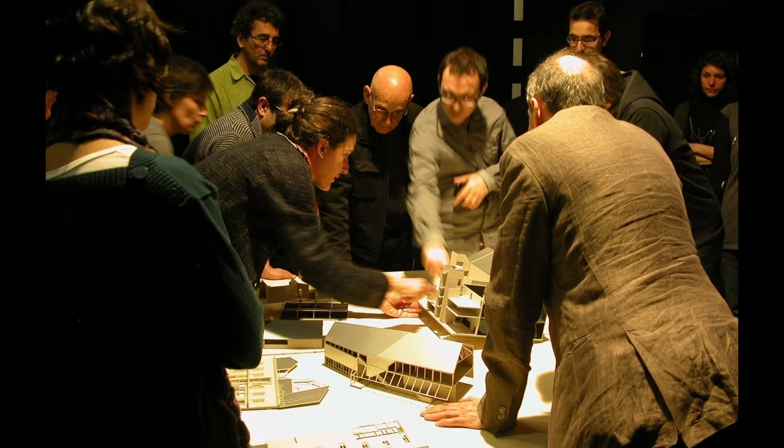This is the board. All these people are very well-known playwrights in Barcelona, but in Spain as well, and they are very prestigious. And still, it's very interesting how they were connecting immediately with the project, with the models. This condition of working with models allowed us to have a very fast connection with them. This is the director, Toni Casares, who is leading Sala Beckett, named after Samuel Beckett, who gave the name to the place.

When they had already been working for 10 years, they asked Samuel Beckett to give the name. He accepted. He was living in Paris still. And then, because the kind of theater they make is this theater of the speech without scenography, and they write theater, he was the one who convinced the municipality to find a place for them.

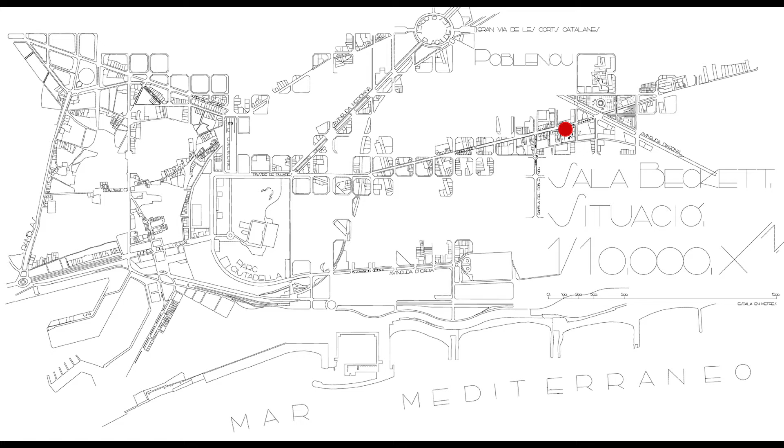Sala Beckett is here. Our office, what you saw before, is here. We are in the middle, in between the old town and the grid. If you know Barcelona, this is the sea, and this is Poblenou, which is a former industrial neighborhood, which used to have industries and cooperatives for the workers spending time there. So this is Pere IV, which is an old road coming out of town. It's previous to the grid. So that's why it's inclined and it's taking its way up to France, let's say.

So the building was here in a corner, the cooperative. It's a very simple building, very clear in structure. Typologically, you can see that it comes very much from the industries that are around, because they have these naves, 2 naves of 11 meters without pillars, with these trusses, and then a central passage, let's say, of 5.5 meters. It was very wide and also very generous in heights. The heights were 5-6 meters. So it was a place already prepared for other activities besides the cooperative.

The cooperative went bankrupt in the 1980s and it closed. So the building was abandoned and had different uses and also decayed. It had water, rain coming in, and they had some uses in the ground floor as well. So it was in quite a decadent state, but still there. The building hasn't always been like you have seen it.

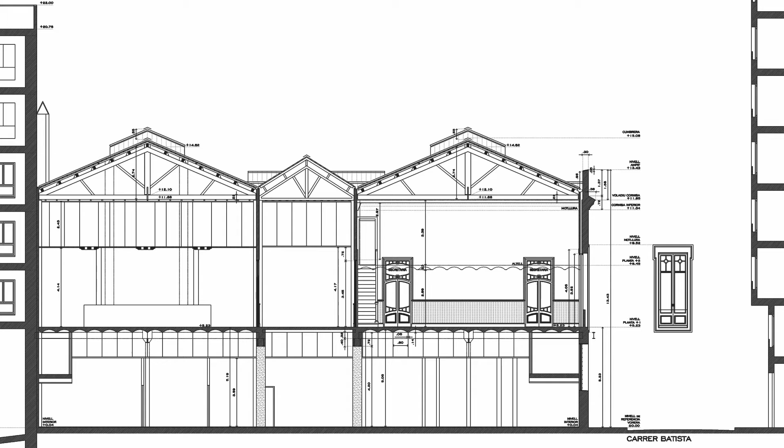When it was built in 1924, it had this front here on the top. It was a kind of signal of the front door, and the workers organized a space to buy food at a better price in the ground floor, and then organized leisure time above. There was a bar and a theater. So the section of the building Ricardo was explaining is this simple thing. But the interesting thing is that the ground floor was independent from the first floor. Here was leisure, and here was buying. And the staircase to the first floor went straight from the street up. It was a great space.

It was in the 20s, so hard moments, and the workers were able to organize themselves to build such a generous building. This is the bar upstairs with all the billiards, 6 meters high, and the grocery store was great, as you can see. Piles of food around it. The same tiles like in our studio, with light, windows, with all the good things around. Very nice, a kind of market, organized a little bit. But this is how we found this beautiful building when we entered it.

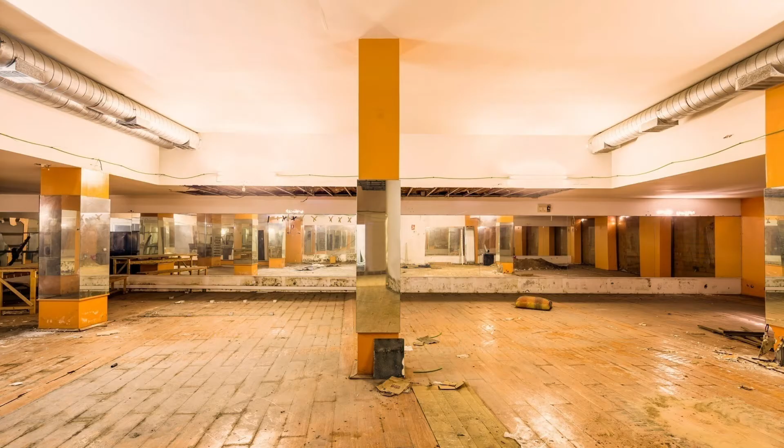The ground floor had been a gym that didn't last, but they had covered all the walls with mirrors. It was blocked. The natural light was not getting in. And even the very thin pillars we saw were inside one of these. Plastic floors, they changed everything. This is the middle part, the vestibule where the old stairs used to be, going to a mezzanine level. Over the years, the building had been adding levels, the kind of Roman swimming pool they have. So there was no clue of the former cooperative, only a small staircase coming up. And the first floor had been left as in the years of the workers.

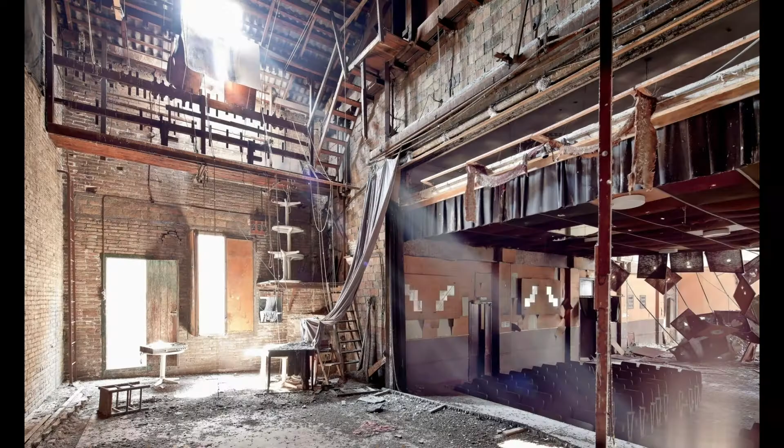This was an old school that was built in the 40s, slightly later, on the back of the building. But you can still see the light, and classrooms can happen here. The theater instead was very much destroyed. The only natural light was getting through a hole. So it could be a menace of destruction for the building, and it really was. The rain, pigeons, rats were inside the building. But we thought that this ray of light visiting the building was a sign of optimism, that again, this space could give theater. Also because the decadence was very impressive as a scenography itself.

The building was not listed, so the neighbors who were part of this former cooperative could see the building in decay from above. The neighbors living around could see the roof every year with more holes. The theater was where the roof was in much worse condition.

This one was the old bar that you saw in the photo. The bar was still more okay. This was a competition, and we were visiting the building with the director of Sala Beckett and the other 5 teams. And the director pointed at the walls and said, okay, Sala Beckett, we dedicate ourselves to writing. We put plays on display for the first time, but we are looking for new writing. So coming here to work for us every day, we like not having a white piece of paper. So we like the stories around this building.

But he said, it's up to you. The building is not listed, and if you think that this is not strong enough or can't resist a theater that I want to work with the full conditions of modern conditions, it's up to you to decide what to do with it. But Ricardo and I, we love the building. We love the huge spaces that are not so common to find in Barcelona, and we love all these elements.

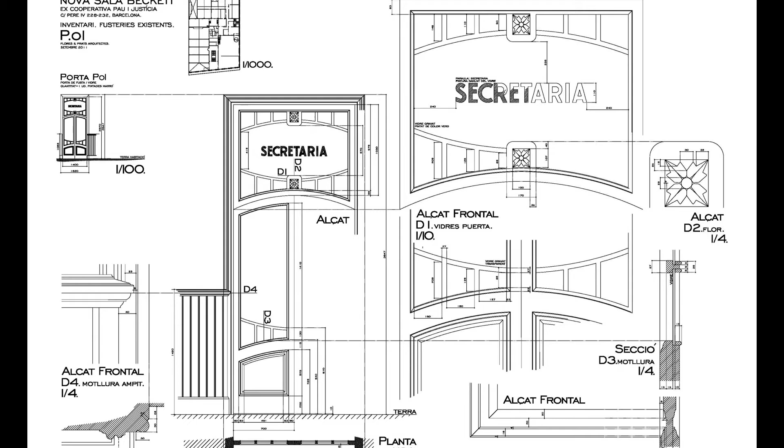So when we got the competition, we started drawing. We spent 3 months inside this building, drawing all the elements that we thought will be useful for later as a treasure. Also because still today in Barcelona, you can find containers in the street with buildings being renovated, and a lot of these doors still out in the street that no one cares for. So we knew we had to draw it carefully to make the builder understand that this was important for us, that this was our treasure, and we wanted to keep it.

We wanted to keep it, but we didn't know where, because all the distribution of the building will change. So these doors will move around, but we have them. Every one has a number. We have this kind of arsenal of doors and windows. And we were placing them in the model as we were learning how the building will work again.

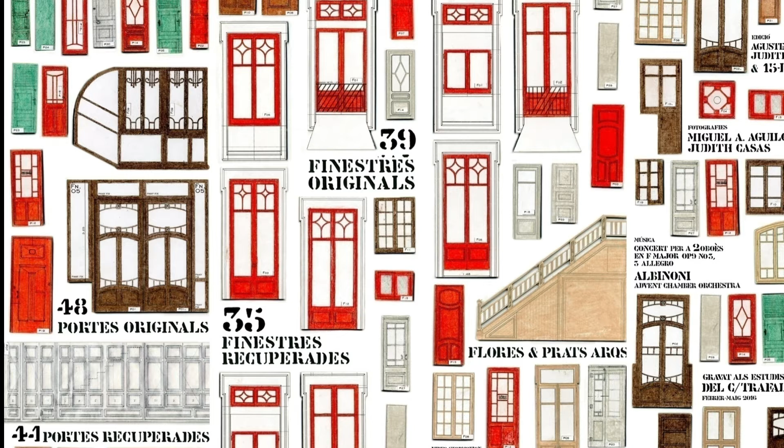They also had colors. And in the colors, there were signals of these times that everyone was talking about. We noticed the colors were more pastel in the 20s, more light colors. After the Civil War, they get into this dark brown. So the doors themselves carried information in their colors. The same thing that happened with the colors and the doors.

We started to think that the walls were also a remain that we could bring over to the new project. So we drew all the sides, all the facades of the existing building, all the interior facades, to bring them into the model and have something already from the beginning that we wanted to keep.

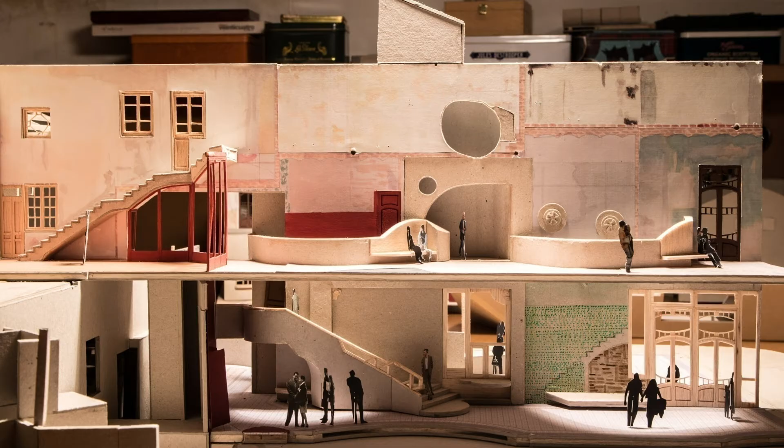The vestibule, which is what this model shows, is the key part of the project in the sense that it's connecting all the building. Because as Eva said, if you remember, the ground floor is a grocery, the first floor is a cafe, in the back part is the school for the kids. But now it's only one project. Sala Beckett is all of it. So the vestibule should show how all the building works at once.

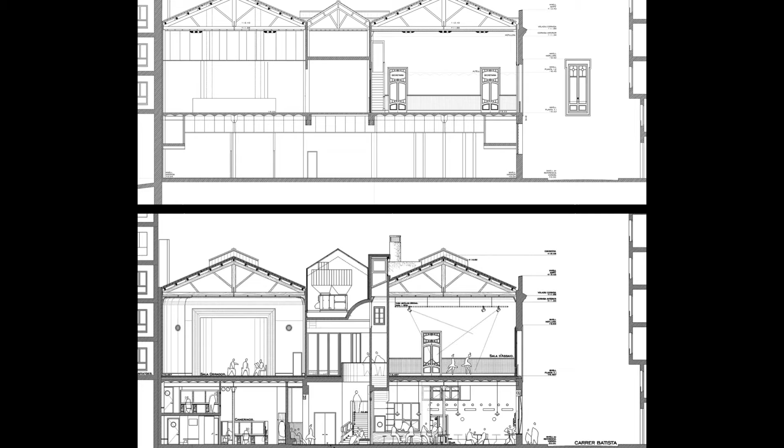So the vestibule with these new openings is connecting vertically, and with the light and the circulation is the way we were intending to make the students or the people who come in the morning to work and in the afternoon understand that everything is working connected.

So in the ground floor, you had this former gym that Eva was explaining, and the proposal organizes in the corner a public part with a vestibule where you enter, you can collect your tickets, there's a sofa, you go to the toilet maybe, and then you go to the bar. All this part is the vestibule. Bar and vestibule is one thing, and there's another entry for the actors, which go to their place to prepare for the play, and that's the main exhibition space in the back.

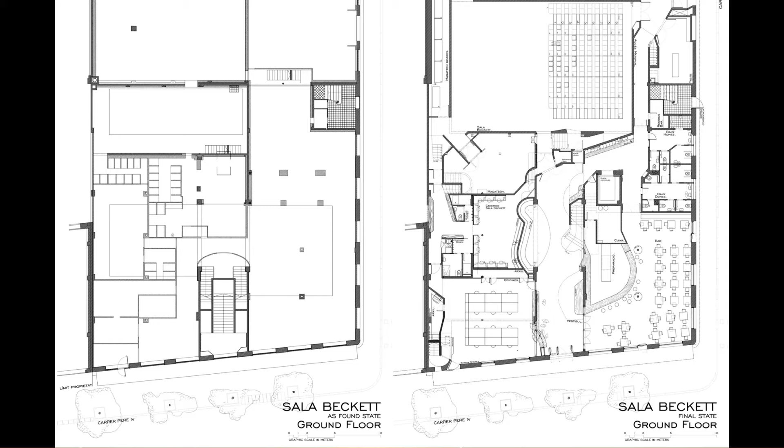So that's the ground floor level, and there's an entry for goods and for the technicians on the lateral street, for them to have a workshop and all the materials for the play.

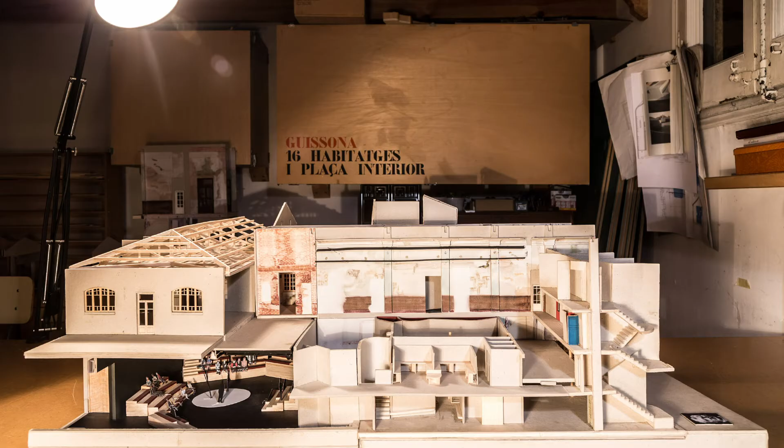This is the vestibule, the main exhibition space. The former school for the kids is still a school for teaching theater.

The mezzanine, which was this kind of in-between space that was already built, we eliminated as much as we could to recuperate the original heights, except for one part that was kept for the authors, for the theater directors, this little bit over there. They call it the Authors Club.

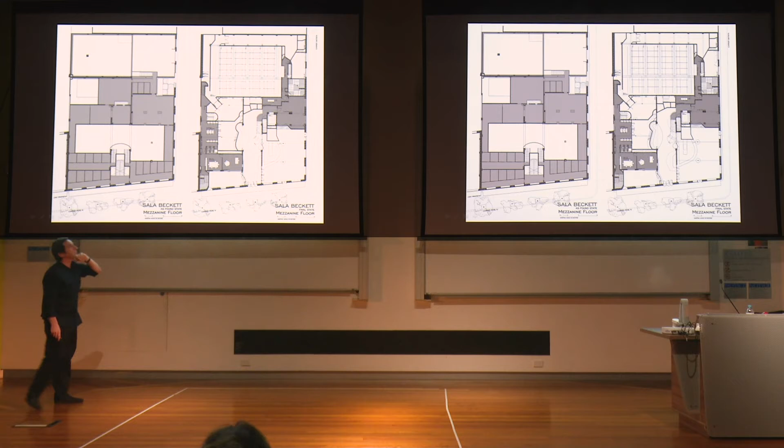It's a place where mainly what they do there is meet. What happens is that the directors of the play don't want to be present in the theater the night of the opening, but they would want to know how it goes. So there's this kind of dilemma.

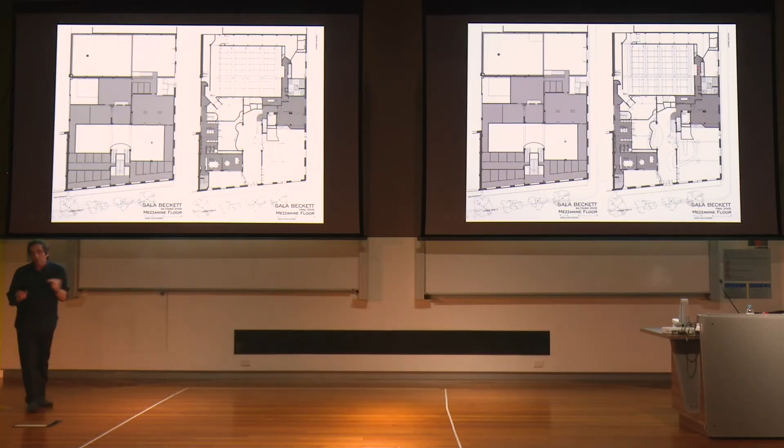So what happens is that we did this connection to the technician room over there. So they go very slowly and they are behind the technician to see, and they say, oh look at that, there's the people of the journal, whatever. He will kill me, he will destroy me. So he comes back over there, drinks a scotch, and gets knocked out for the rest of the night. More or less, that's a bit the situation, no?

But they are in a bridge between the bar and the main stage. In that area, there's another dressing room for the people who play upstairs. So we have ground floor dressing rooms and mezzanine dressing rooms for these people who play up in the former theater. So this connection makes them appear in the former stage, but now there's no stage anymore.

Everything goes on the same level because Sala Beckett doesn't work with stages, and they change constantly the relationship between public and scene, as you can see also here on the ground floor. So you can have theater simultaneously in the two rooms, and also in the former cafe there's a rehearsal room, so you can have sometimes a small place there. So the former theater becomes a theater.

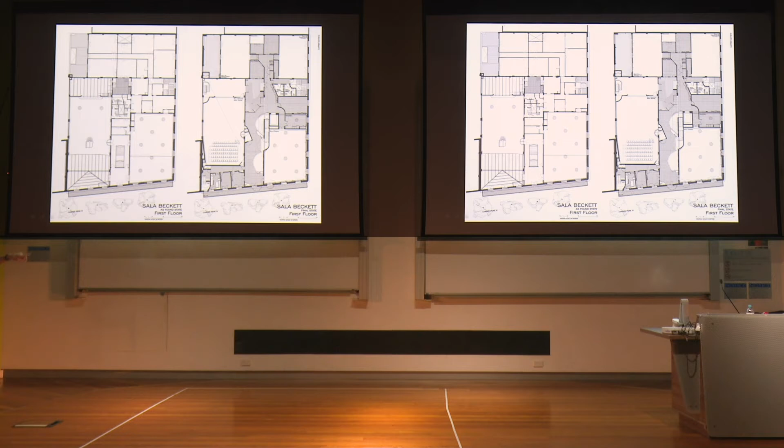There's a part of offices against the light. And the most complicated thing, let's say, about the project is how to connect and bring all the back part connected to the ground floor and to the frontal facade.

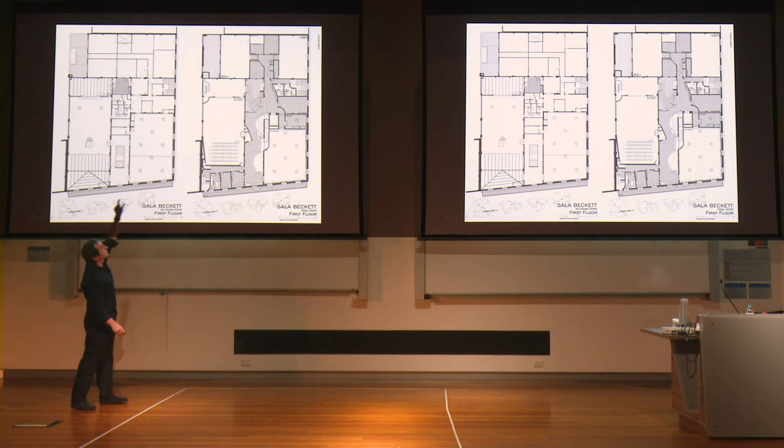That was what gave us the most work, because we had to make it work continuously so that you didn't realize that you were passing from ground floor, first floor, and to the back, let's say, property, the last nave, without any limit or realizing it. So the courtyard in the middle helps a lot, and the skylight over the staircase as well.

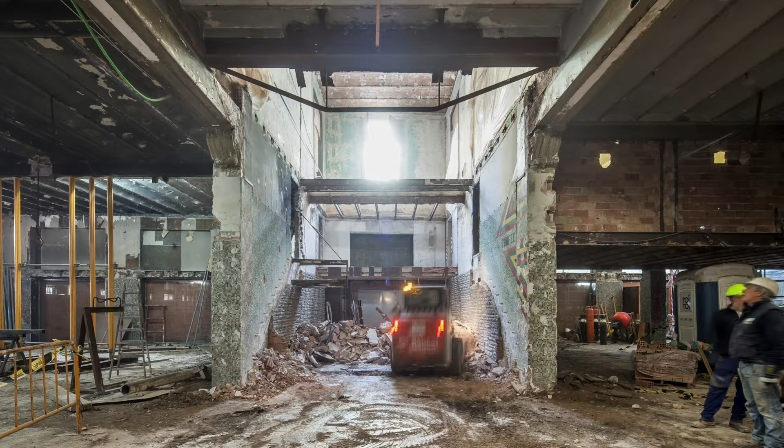So when the building started, as you saw, the building was in very, very bad state. The first thing we had to do is remove the central floor slab, because it was also very discontinued due to the former bathrooms of the theater, the staircase that was there but also falling down, etc. So the central part, which was the one we were going to change entirely, was the first thing to take away.

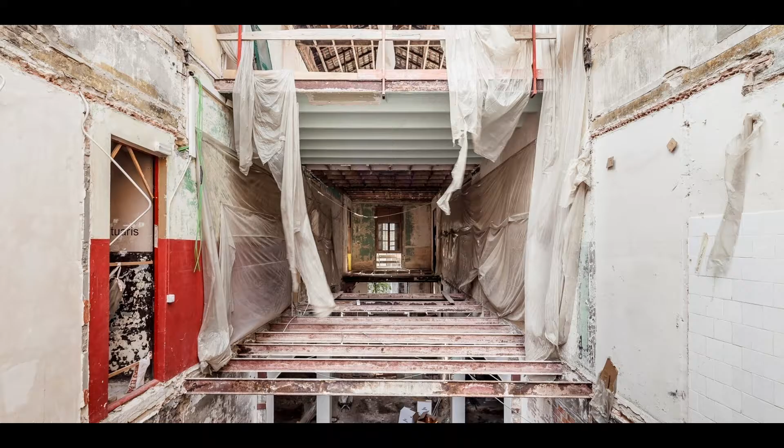In certain moments, you see that the building is suffering. If it was already a ruin, you are like accelerating the ruin. You are bringing the ruin forward. You don't know really if the building will support it or not, because it's shaking. It's very violent, as you know. So there were certain moments of tension, of uncertainty, because you don't know how much it will resist.

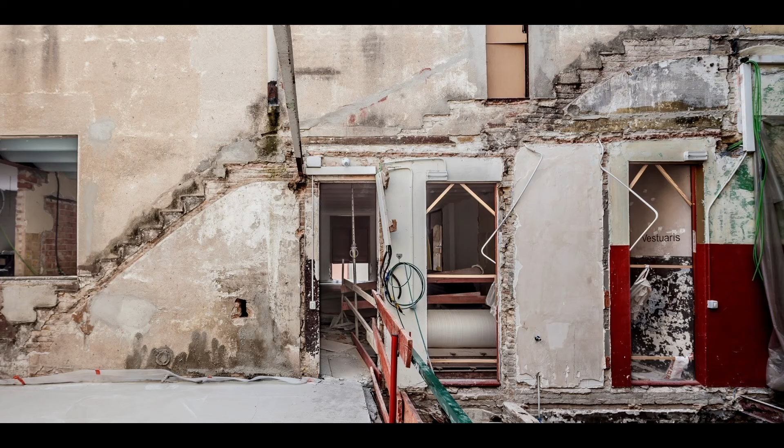But then all the doors are sent to storage. All the walls, these lateral walls, are protected with plastics because all those paintings, we like them, even if you don't know if you like them or not.

But at the moment, you protect it, and then the builder says, 'No, but what are you protecting? This is going to be painted.' No, we like it very much. 'No, how can you like it if this is nothing? It's a ruin.' No, we love it. So it was constantly this kind of fight about protecting something that you don't even know if you will like at the end or not.

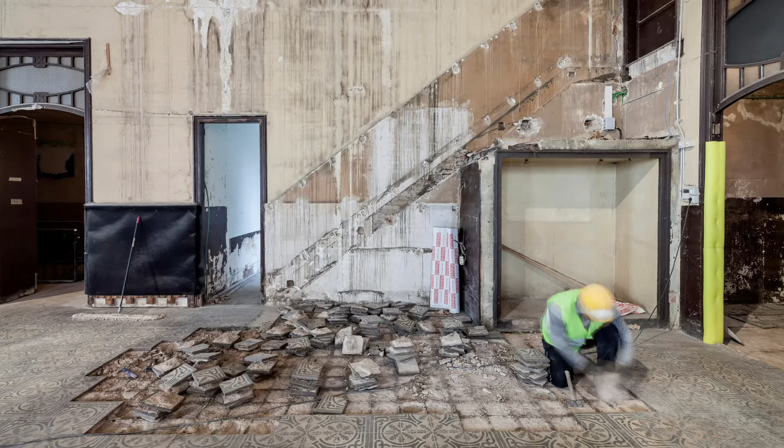But at the moment, you protect it. Then you take all the tiles away. The tiles are in our office. The doors also are similar because it's built in the similar moment.

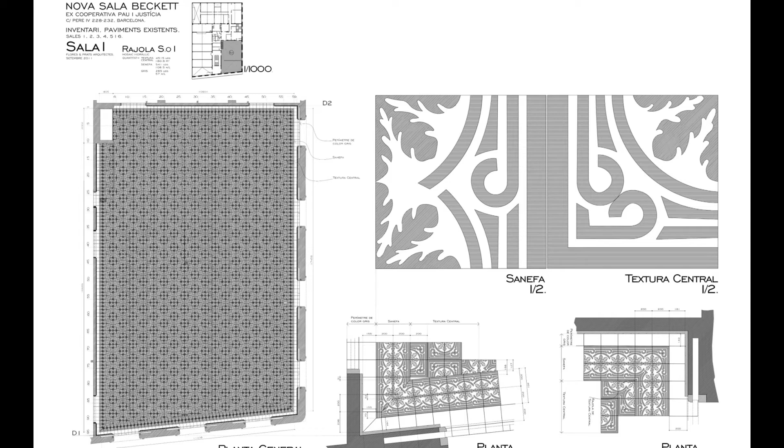So we have drawn all the tiles of all the rooms, the same as with the doors, roses, etc., in this inventory, to know how many meters we had, how the turns of the corners would work, etc., to reuse them, to know how many of them we had, even counting that many could be broken, but still it was what we had to work with.

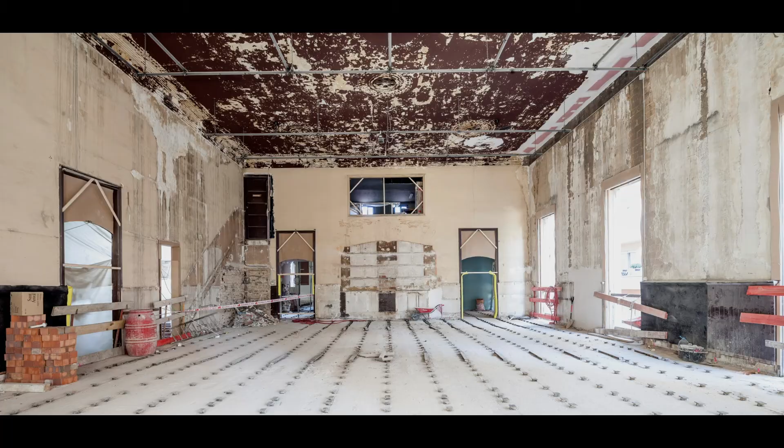So all of the rooms were inventoried and then sent again to storage. So at a certain moment, all the first floor was empty. We had to reinforce structurally because the building was from a time with other norms. So we had to reinforce it, and also acoustically. So these are the moments where you empty it, all the tiles are away, the doors are away, everything is away in storage, and then you reinforce.

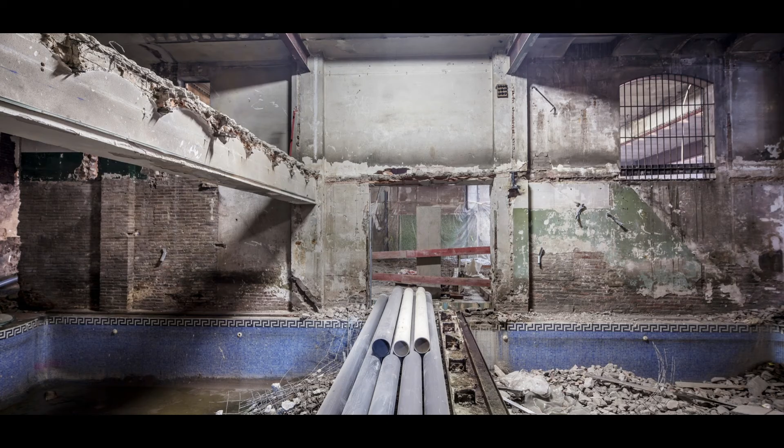In the meantime, on the ground floor level, we destroyed the sauna, the pool, the beautiful Roman pool, making more space for the new theater. We grounded it down and then demolished this wall, because one of the conditions of Sala Beckett is that they needed a 15 meter wide space for the theater.

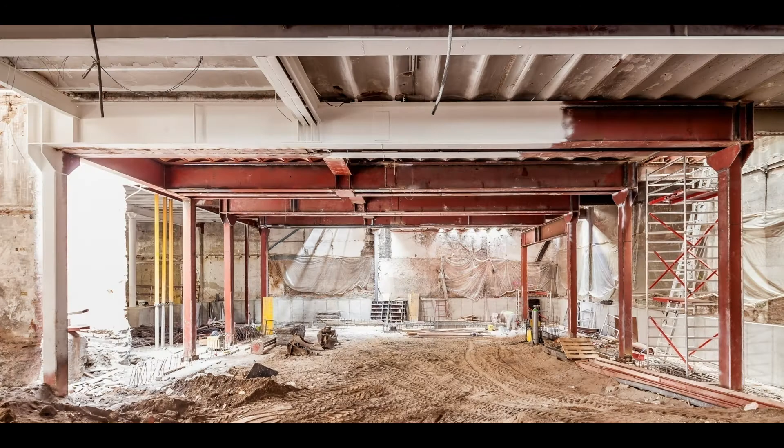So we had to put a beam to support one of the walls to make this wider, because they wanted to have a space where they could make different positions of the stage and the public. For this to happen, you need a minimum of 15 meters: 4 meters of public, 7 meters of stage, and 4 meters of public.

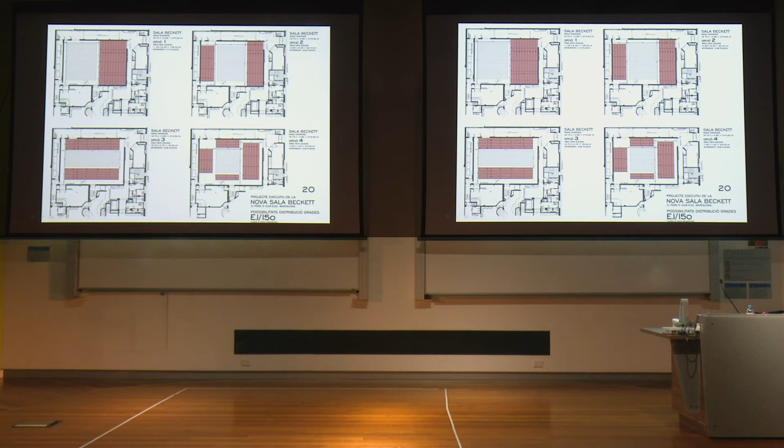There was nothing like that in the building before, because if you remember, this was 11, this was 11, and that was 11. So we had to demolish some parts. On the ground floor, the back was the less historically significant part of the church, so to speak, so we did that action over there.

The good thing is we didn't have any preconceived ideas. We were fresh to it, so we brought all our knowledge from rehabilitation, but not from the theater world. They knew very much how they wanted to work, so this mix was really key. They were telling us all the time what they wanted and what they didn't want, and we were saying what we wanted for the building to be.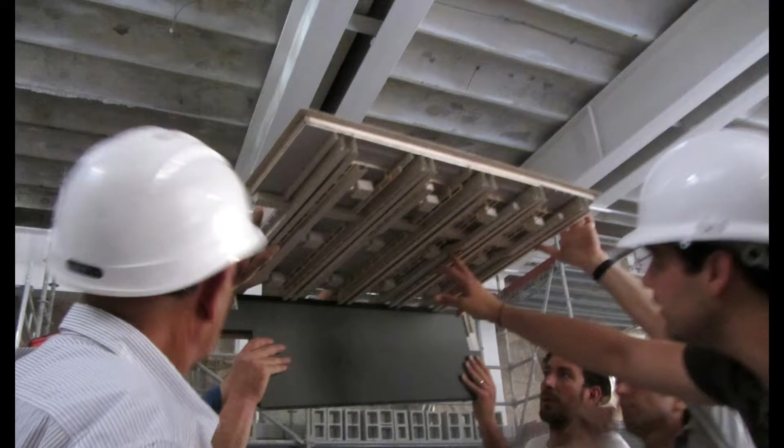The models later went to the site—these models helped us determine where the air conditioning, supplies, and all the mechanical installations would be. So the model is something we use from the initial stages through to the construction site. It serves different purposes at different stages.

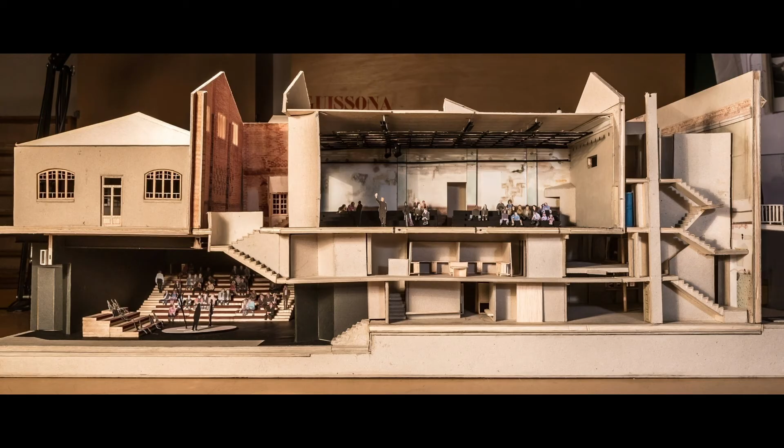This is the ground floor space, which, because it's new, they wanted painted black. It's the only piece in black in the whole building. Whilst on the upper level, the theater was kept mainly as it was.

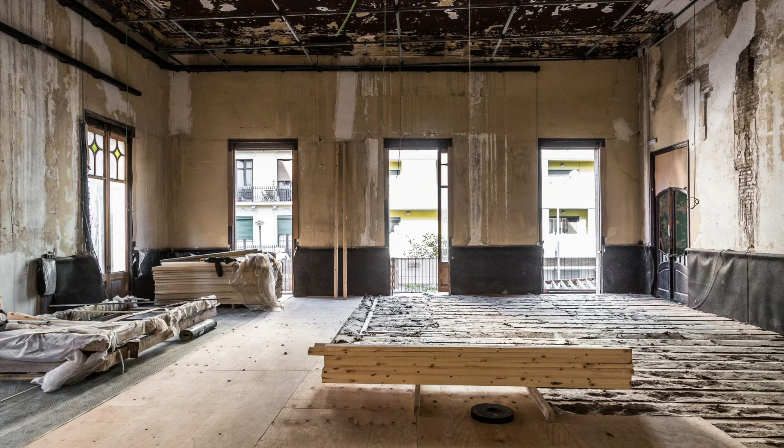But you see the floor is not the same—the floor is not tiles. They wanted wood for the theater spaces, and that's why we could take some tiles to use elsewhere. There were several layers besides the acoustic ones to put in the wood, and it was a very well designed wood layer worked out with our advisors—also for the former cafe, the rehearsal room.

So all those tiles that were here before are not here anymore—we could use them in different places that had no tiles. This is the former theater, this is the former cafe, the school. So in the vestibule you see tiles from the former cafe, the new vestibule, and some tiles from the school, because the school also has two rooms with wooden floor, which is the green one.

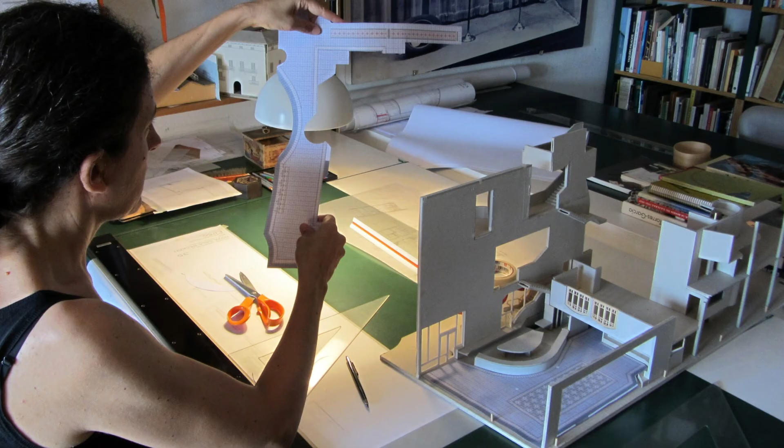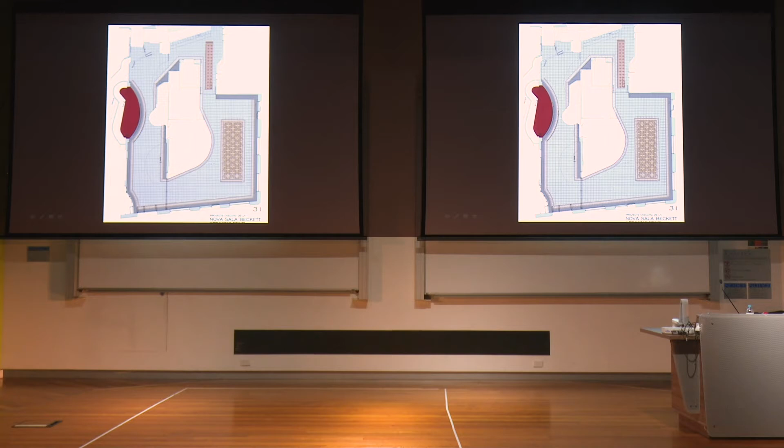We could bring some yellow tiles forward to welcome you. Some of the tiles from this space, the theater, went down to the ground floor level, because, as you know, there was nothing there. So all the tiling of the welcoming part of the vestibule and the bar was carefully done with the upper level tiles, trying to emphasize the circulation around the kitchen and bar—everyone moves through there. This central part is very important for the vestibule, for expanding the vestibule out to the street.

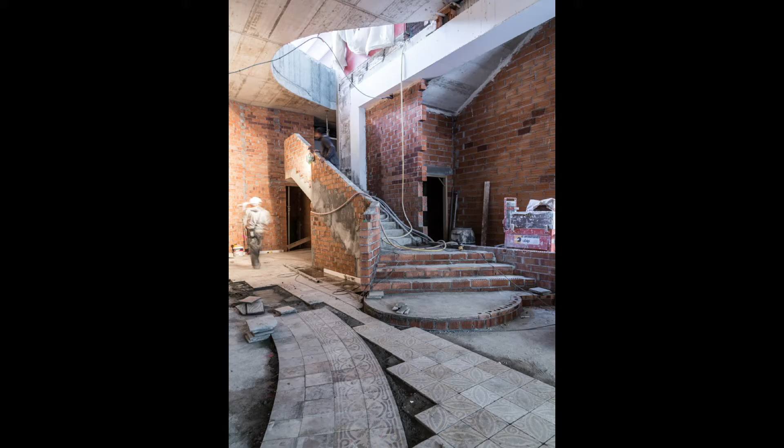We ran all these tests to know how the tiles could curve, because we'd been doing some curves, and these tiles aren't designed for that—they're only meant to be laid orthogonally on the floor. So we were worried about whether this pattern would continue properly or not. We made all these tests before going to the site, telling the builder: yes, you can cut it and make the curve, cutting just so much each time.

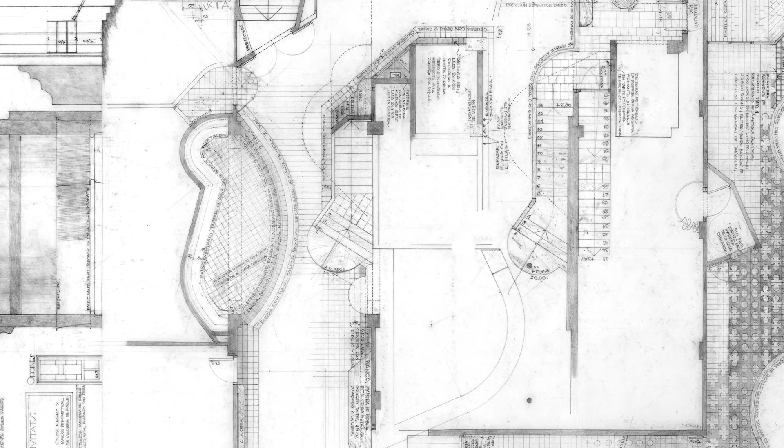He was delighted, of course, to do that kind of work, but it was all part of the project. This happened all around the first floor as well, so the laying of the vestibule downstairs and upstairs is very continuous, because in a way, it's the element that carries you all the way up.

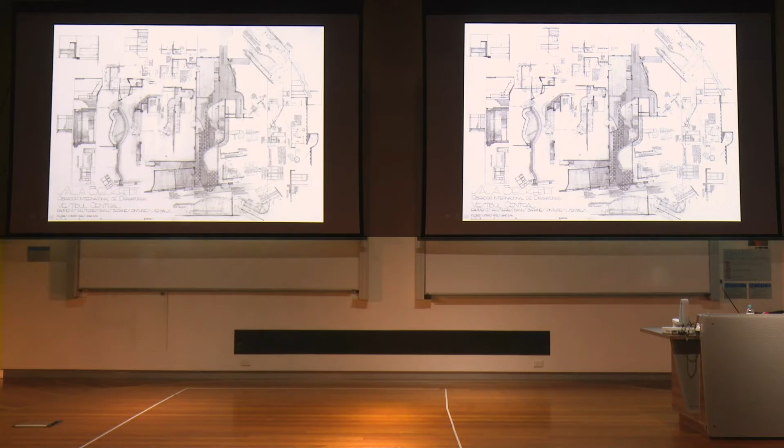This drawing is explaining the ground floor and first floor, and as you see, the pavement goes into the back, but also shows the lateral facades because the benches and the holes in the walls are continuous in plan and in section. So those drawings for us are very important to try to control or explore everything we want for the same space.

So finally, you see the pavement is not located exactly as it was originally. It's a bit moved in stripes because it's a corridor place. The yellow ones over there are coming to welcome you from the children's area. Some of them returned, of course, broken, but they were located continuous. There were the ones that were held.

We told the builder, well, look, if you broke them, cut half of this and cut half of that one, and you make one out of two, which again he was delighted to do. And this was the kind of discussions and fights on the everyday. So because it was very, very low budget and we had to use everything we had, also because we valued it.

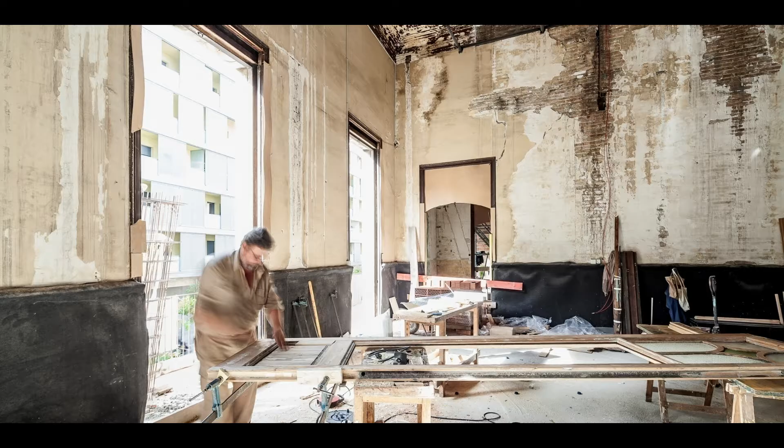So also the doors were waiting there for being relocated and refurbished. They had very good carpenters, fortunately, who were extending, modifying, adapting everything. Every door was useful. Nothing was going to be thrown away. Fortunately, they knew how to work with this wood and with this kind of moldings and that.

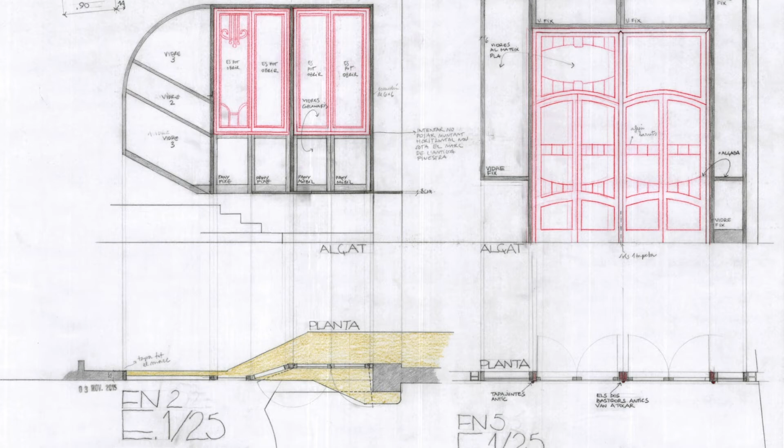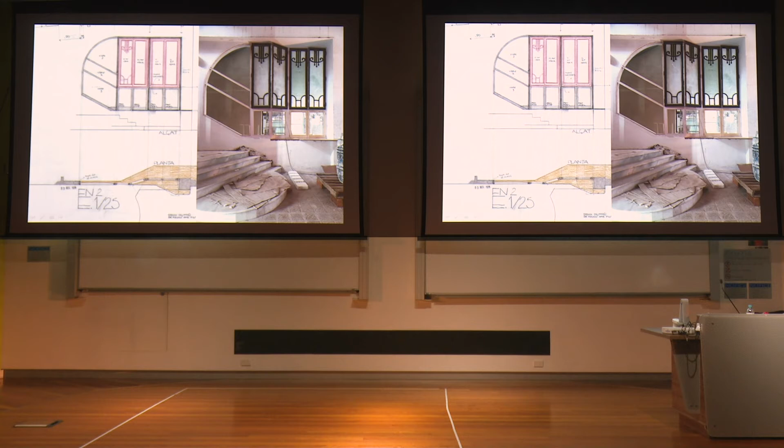Some of the windows went downstairs, as Eva said in the video, and they were extended to make a bigger window because the space was much grander than when originally was. I think that window is 2 meters high, the original one. So that means the space is huge. You think a 2 meter window is huge, but in the space, it was still small. So you had to adapt and make it bigger and so on.

So all the things of making new and all working together was probably the most interesting, and also was discovering with the working. There was a moment when almost all the doors were in place, and the floor slab had risen up, the tiles were again on the building, and we started looking at how much building we still had, because with the construction, new foundations, excavation, we were really afraid. We didn't know how many of these walls would resist, just 15 centimeters width.

So we started thinking, at this moment, the builder was asking us what about the colors? What about the painting again? We thought that maybe we should need some painting, but we didn't know yet how to apply it to these walls because there was a lot of information in the walls. There were all these traces, and we didn't want to detach the new operations from the existing ones.

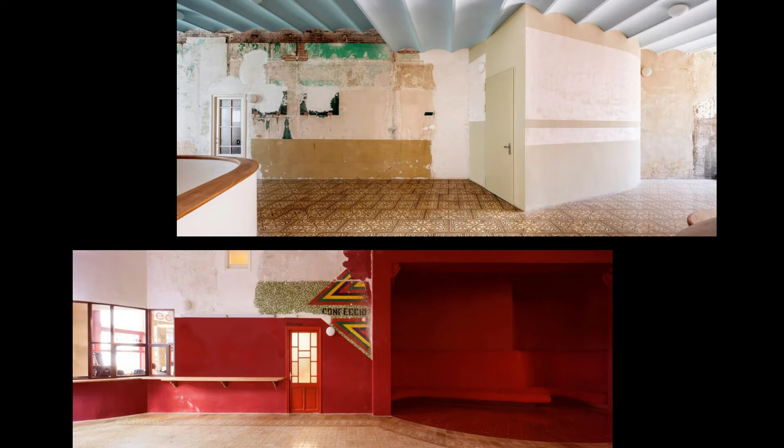Little by little, we decided that the new pieces, like this cabin, a double door to get into the theater upstairs, would be painted with different horizontal stripes, like the ones we found there, so that nothing would be painted in just one color. And the colors would be decided from the floor tiles or maybe a door.

This is the wall upstairs and downstairs of the vestibule. The red from the old door gets applied to the bench, and this new big door piece is quite big. It's the entrance of the theater, and we wanted to make it quite a red theater thing. So you see the traces are all over.

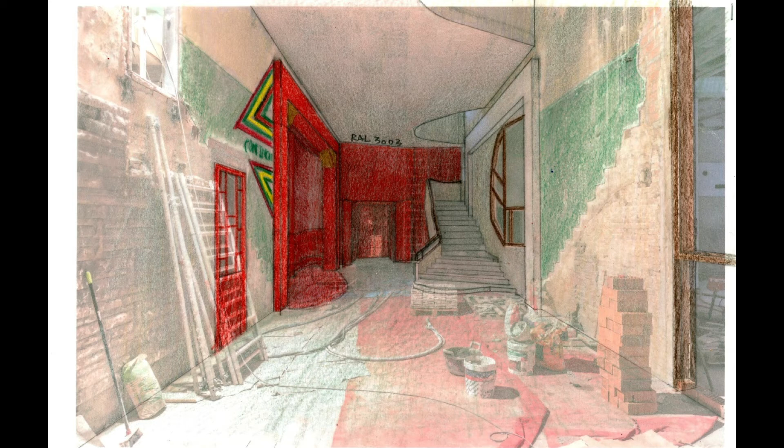We had to reinforce this arch that was already existing on the ground floor, this one. So we were thinking how much we apply. The way to have a measure for it was to take pictures on site of every scene and how the construction was at that moment, and paint on top of them. With these scenes, we were hanging them on the wall, and the painter was following the instructions from them.

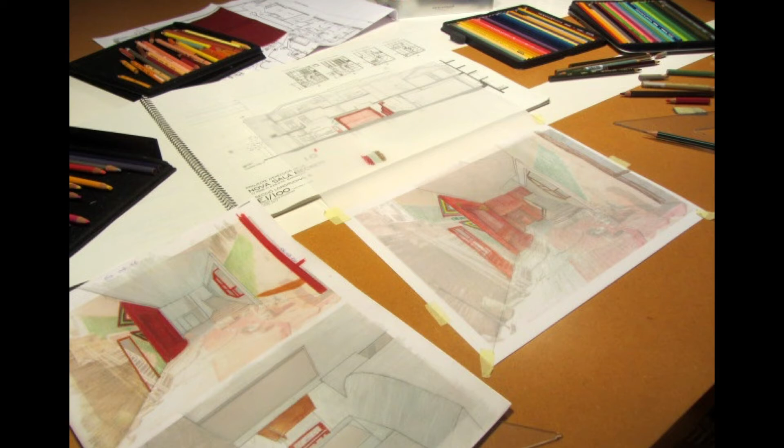So room by room, we were painting, and even a room that had a lot of, like the dressing room, had a lot of walls that were new, but we thought the rhythm of information for your eye all along the building should keep being the same, never detached from what was there already and what we had been doing new.

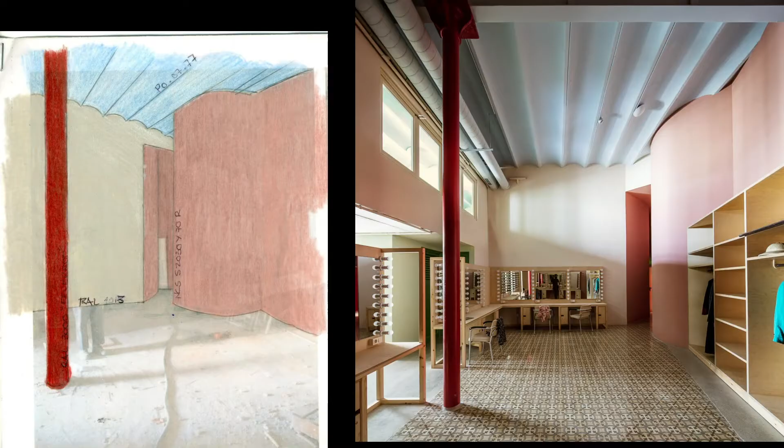Here are again the tiles that we brought from above, down here, that make up the dressing room. In the bar, it was the same, looking at some tiles that were left on the walls and painting them. But the information is very similar when you move around the building. Here are traces of everything, even a small fire that once was in the building.

The green tiles that appear behind the gym walls are from the 60s. So the workers' cooperative tried to modernize in the 60s and change some of the material. All is here: the 60s, the tiles from the 20s on the floor, accidents, also marks of the construction, like the new beam that we had to reinforce there.

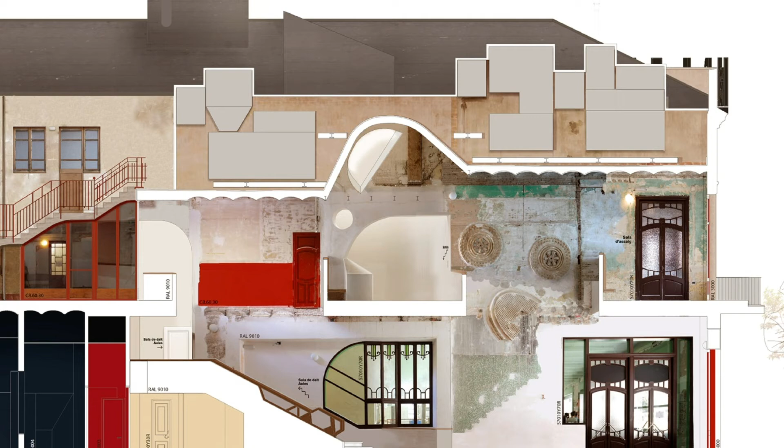So at the end, we had to put all this information together. We have been working by scene, so we had these long sections where we put the codes of the colors we have been using, and we drew it all together. So you see some walls haven't been touched, so there's no information, but in the fragmented pieces where we have been applying color, you can find the color there in case they need to repaint it.

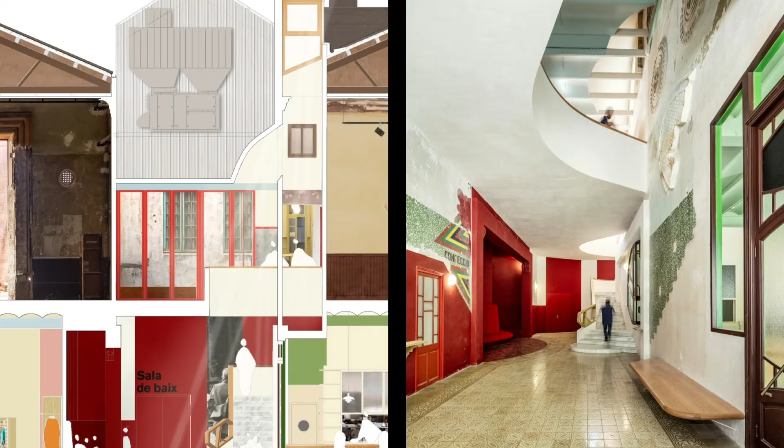So in the middle of the building is where the intervention gets more intense, and it's where the natural light gets through and connects these two levels. So as soon as you step into this building, now that it's finished, just two steps, and you see something is going upstairs. Because Sala Beckett is not only theater at night, it's happening all day. They start at 10 in the morning and go until 12 at night.

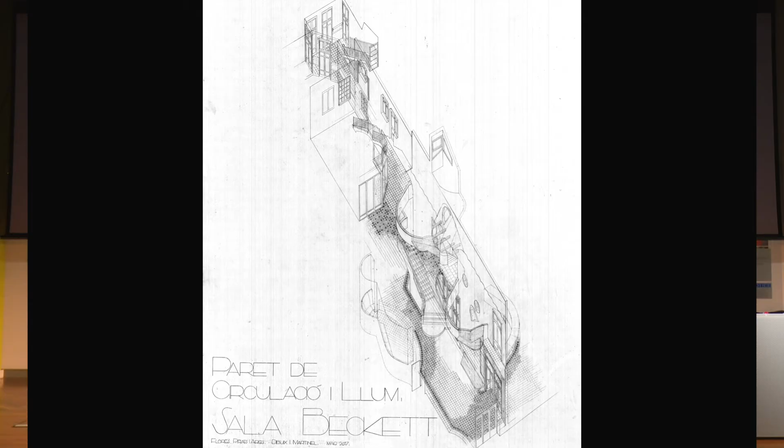So this vestibule is working with natural light. And you have this connection with the first floor. Also because it's something that the director was very keen on, mixing the creativity or the fabrication and the exhibition much more, making a building that you can cross and go from the more public areas of the street until the back of it where the classes are in a very easy way, very intuitive.

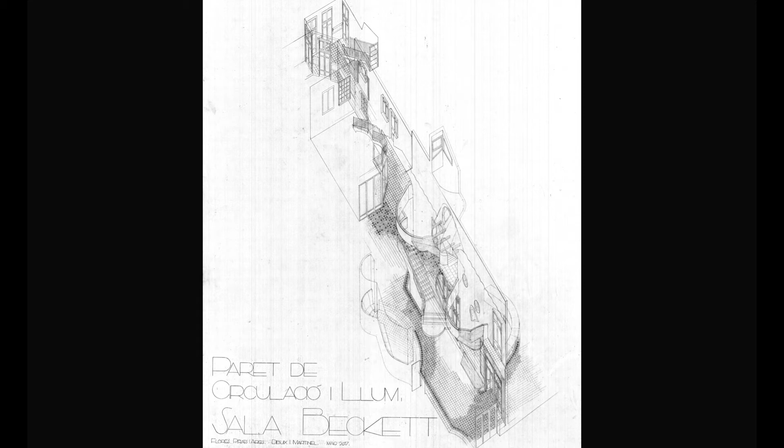So these interventions rely a lot on this. We made this drawing at the end: all the circulation and the activation of the building relies on this wall, one of the walls of the vestibule, but we cross it different times. We cross it in the bar, we cross it later with the staircase. These holes also show it, and then you go up till the end of the vestibule of the classes. It's this in plan. This was the exercise.

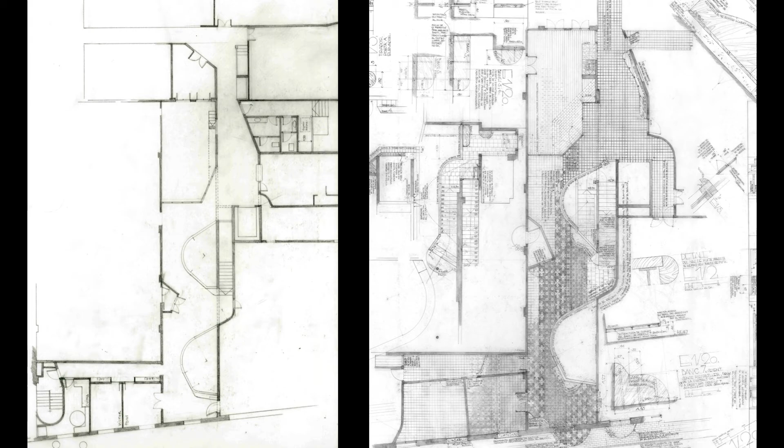Before, all the classes at the back were independent. The students would come up from the old staircase. But now we wanted it all to work as one building from the entrance. So this is the first floor, and this is how we move backwards till the end for the lessons. The way that the pavement is placed also corresponds to these long lines, so that you walk here and you cross it and you appear at the more private area of the building.

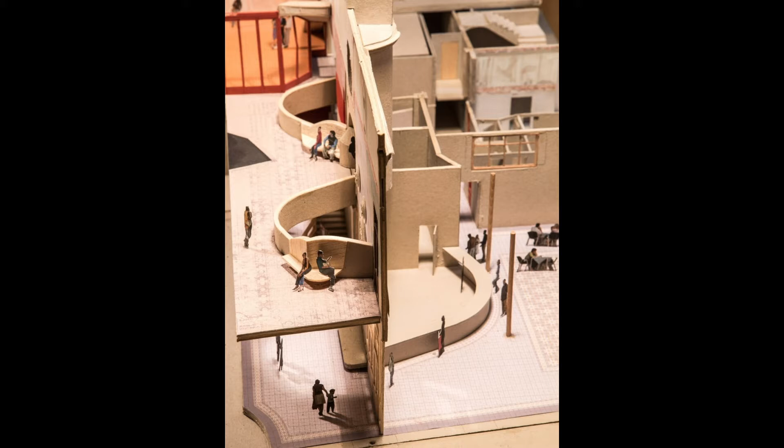The model shows it very well, how much things rely on them, even the bar, the counter of the bar downstairs, the holes. It's like you move around this wall and you go through all the building. Also, it shows the double height. So the height of these 15 centimeters coming very far above. You can see it through it. So the walls also sometimes become almost detached from the building. And it's very, very thin. And you can see people moving from one side to the other.

And here you cross it again to go to the classes. And the patio that we enlarged is an extension of people meeting outside. It's a place where they rehearse sometimes. They feel very comfortable. And this long view, you can see it from this space, you can see it from here. So this wall at the end also became, we read it a little bit like a scenario, part of a scenography that was making people working in Sala Beckett appear and disappear very easily.

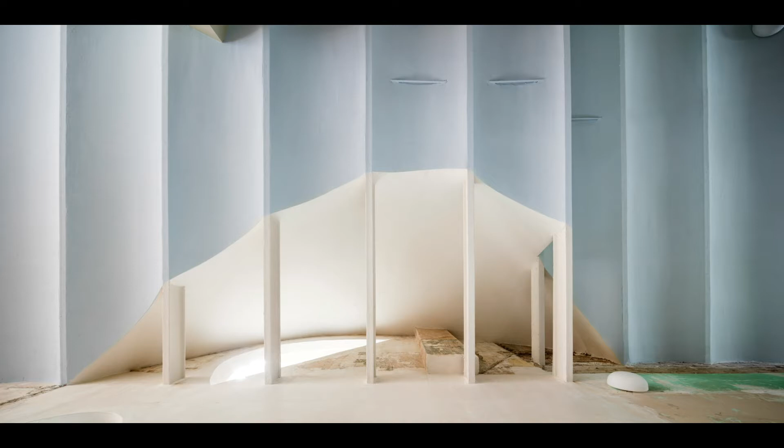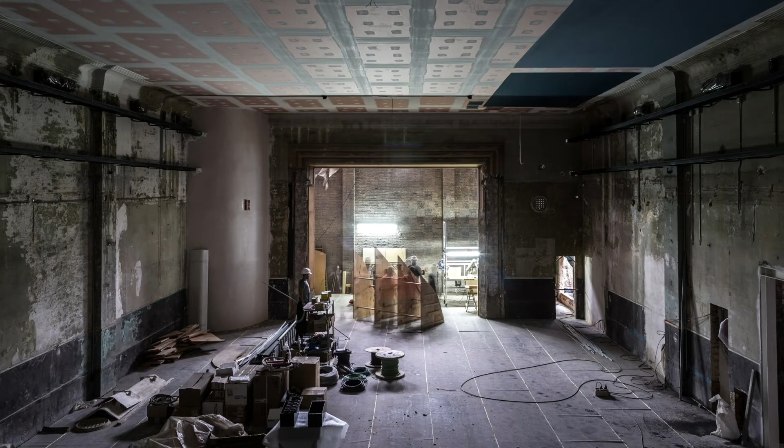When you come up, you also see this kind of cloud up there. There is a skylight. This skylight, we opened it to get the light from the other side of the wall. We were testing it in the model, seeing how much light we can get from the other side into here. It's this one that's being built. So it's a break that we made. This was like the first scenography we prepared.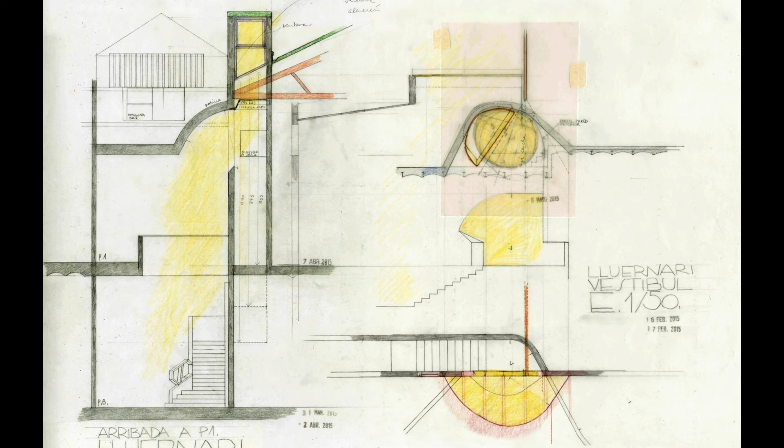This is the form, the wood that will be used to make this half dome that we wanted to build here against this wall again. This is the cut that will let the light get through it. This cut, we wanted it to be a whole circle, but we have a truss here, so we had to be happy with just a half moon. And the light comes from here, as you see, and makes this atmosphere in the vestibule. It's a more intense moment in the building, but above it is part of the machines of the air conditioning for the big theater rooms.

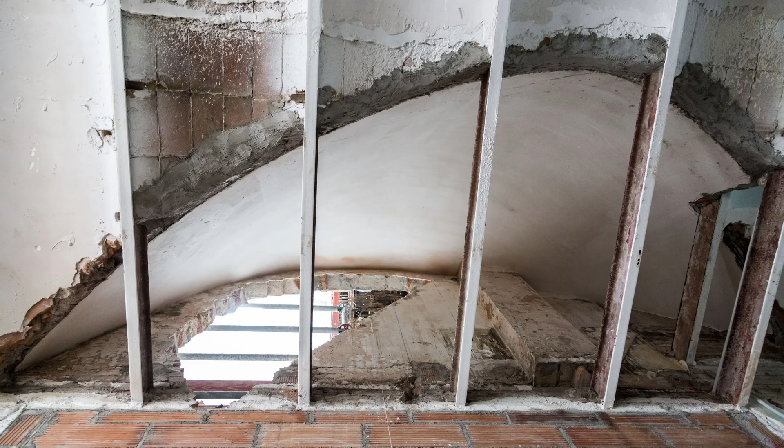So this is something where you are concerned with the building and how fragile it is, but there are moments when you break it even more. So you think, okay, what am I doing, because we are cutting it. But somehow we were thinking that it was the right to heritage, to really occupy these old buildings. When they get to you, if you don't adapt it, and sometimes act with violence into it, you don't get something that at the end will work.

Like having this natural light right in the middle of the building. So somehow this ray of light that we saw the first time is now kept inside the building in the middle. It's telling you what hour of the day it is, also about the weather, and you can see it all. You can see on the walls the abandoned years, the new circulation of Sala Beckett, everything is there.

Thank you, Ricardo, and thank you, Eva. I think one would be hard put not to be completely moved by that presentation. It was totally compelling. And as I said in the introduction, it was one of the most captivating and memorable exhibitions at the Biennale. And through this vignette, which is so personal and detailed and thorough in its explanation, I think we all experienced it vicariously. So thank you for that.

I'd like to ask the audience if you have any questions, just briefly, after this presentation, to direct them to Eva and Ricardo. We can also retire later and ask them more personal questions, but are there any questions from the audience to begin with?